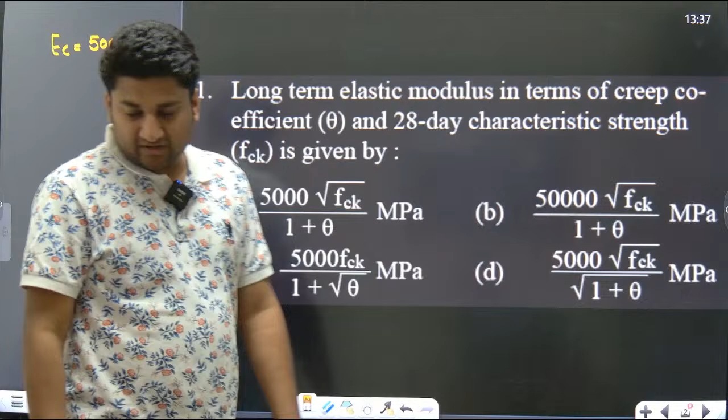Now short-term Young's modulus of elasticity for concrete is 5000 under root FCK. This is short term. Now when the effect of creep is taken, what will be the Young's modulus of elasticity for long term? For long term, the Young's modulus of elasticity is short term upon 1 plus theta. Theta is the creep coefficient. So when you are taking the long term, you need to consider the effect of creep.

Understood everyone? Now look very carefully. So this will be equal to 5000 under root of FCK, 5000 under root FCK upon 1 plus theta. So what is the value of theta? What is the value of theta?

The value of theta depends upon age of loading: 7 days, 28 days and 1 year. Understood? The value is 2.2, 1.6 and 1.1. For 1 year it is 1.1.

Clear everyone? So what is the correct answer? Option A is the correct answer: 5000 under root FCK upon 1 plus theta. Understood? Clear?

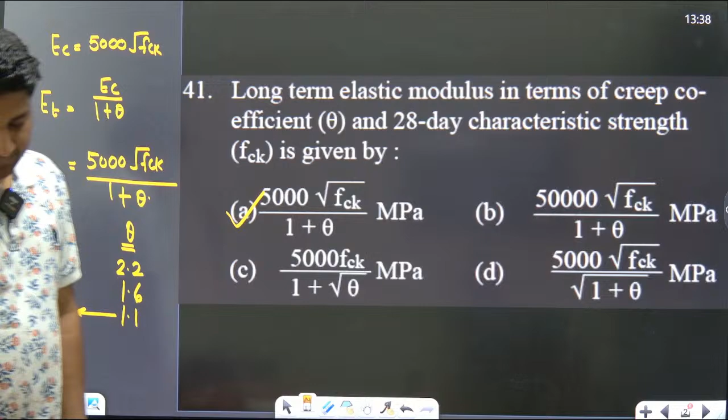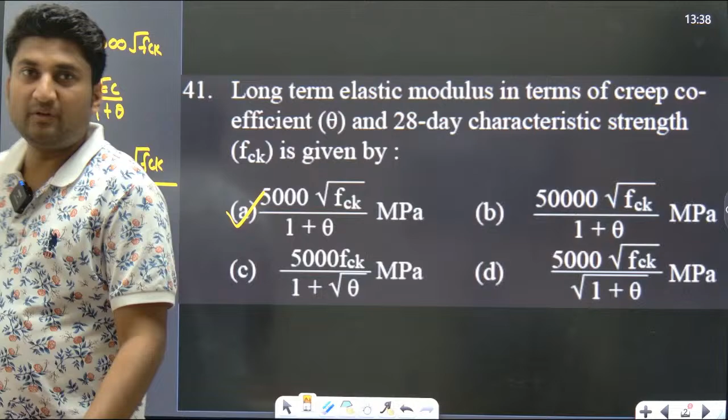Yes, so we'll move ahead with the next question. Answer the next question, guys. If sigma CBC is the permissible compressive stress in flexure compression in service, the modular ratio is.

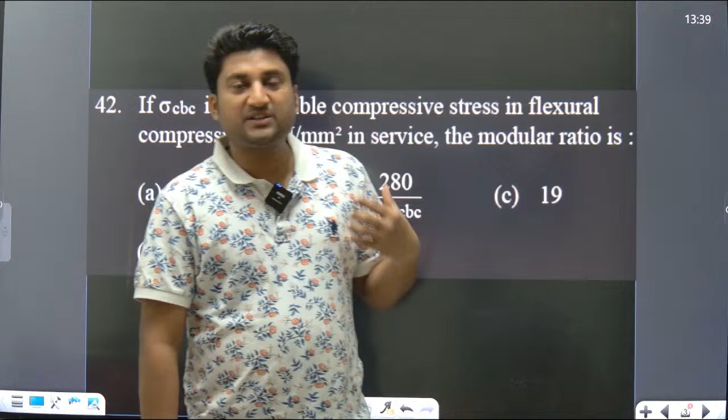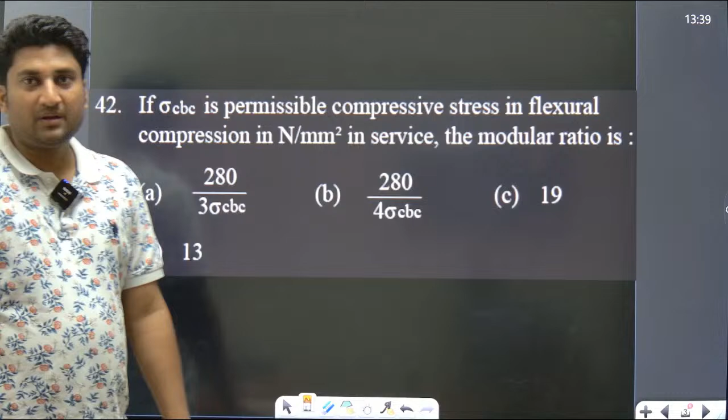The correct answer is - what is modular ratio? If sigma CBC is the permissible compressive stress in flexure compression, the modular ratio is defined as 280 by 3 sigma CBC. Understood, everyone? So option A is the correct answer. Now we'll move ahead with the next question.

The permissible shear stress in concrete depends upon. This is a very good question. There are two concepts: the permissible shear stress and maximum shear stress in concrete. So both the concepts are different.

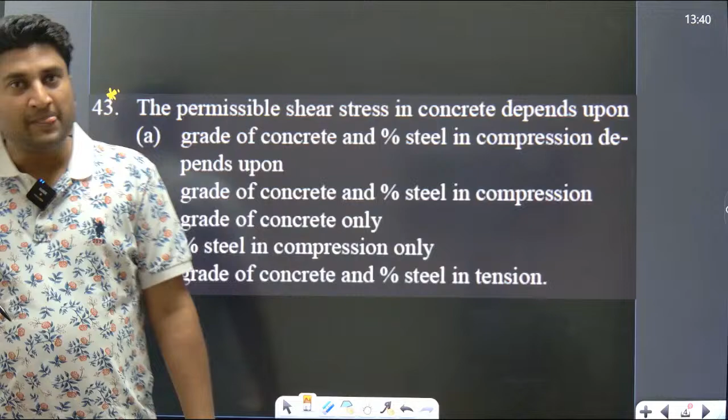We'll increase the level, brother, from the next class we'll increase the level. These are basic questions. The maximum state services exams have these type of questions only. Your speed matters in state services. So from next time I'll slightly increase the toughness level of the questions.

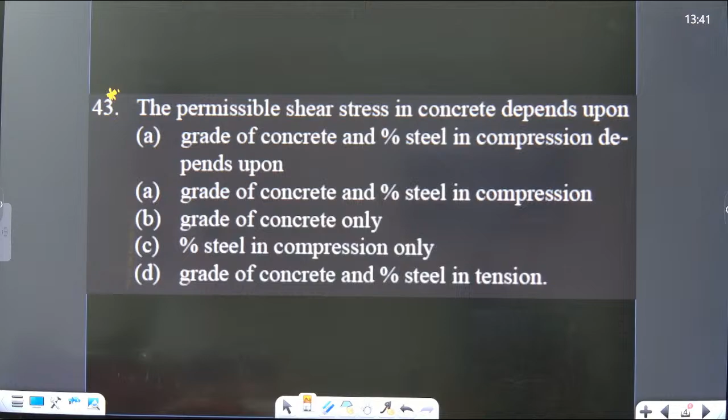Now what is the correct answer? The permissible shear stress. Now look very carefully, what is the permissible shear stress? The permissible shear stress in the concrete depends upon two factors: grade of concrete and percentage steel. But the maximum shear stress of concrete depends only on grade of concrete. Please make sure permissible shear stress depends upon two values, grade of concrete and percentage steel, but maximum shear stress on concrete depends only on grade of concrete. So here you are asked with the permissible shear stress, hence option D is the correct answer.

Option D is the correct answer. We'll move with the next question. Answer it very carefully, this is a very good question.

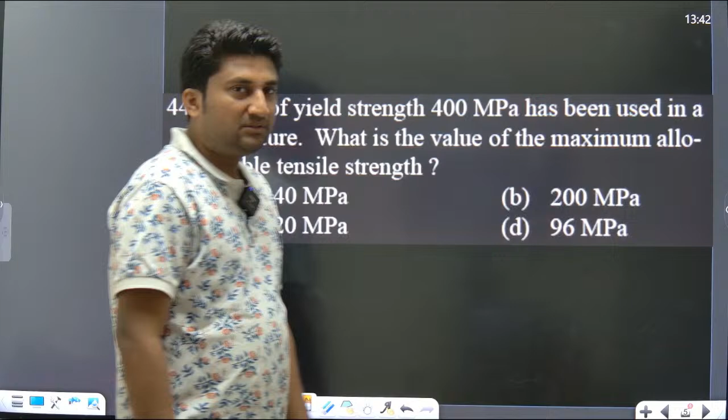This is a very good question. Most probably you'll be able to... please put a star mark because most students will give the wrong answer for this question. Please read it very carefully.

Now yield strength is 400 megapascal. If you have a steel of grade 400 megapascal, now look very carefully. What is the value of maximum allowable tensile strength? What is the maximum allowable strength?

Tensile strength has two values: maximum allowable strength in axial tension. So what is the permissible value? It is 60% of yield stress. And for bending tension, maximum allowable strength in bending tension is 66% of yield stress.

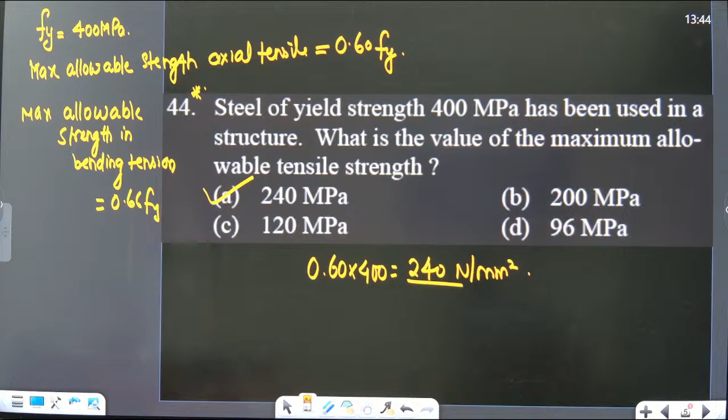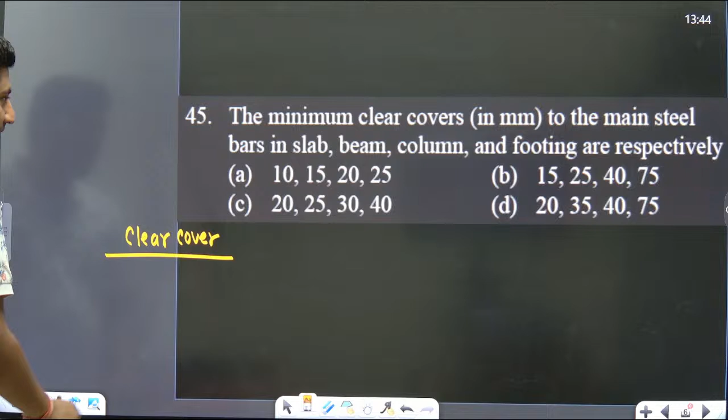Now we'll move with the next question, answer it very carefully guys. The question is about the minimum clear cover to the main steel bar in slab, beam, column, footing. What is the clear cover to main steel bar for slab, beam, then we have column, then we have footing? What will be the correct answer?

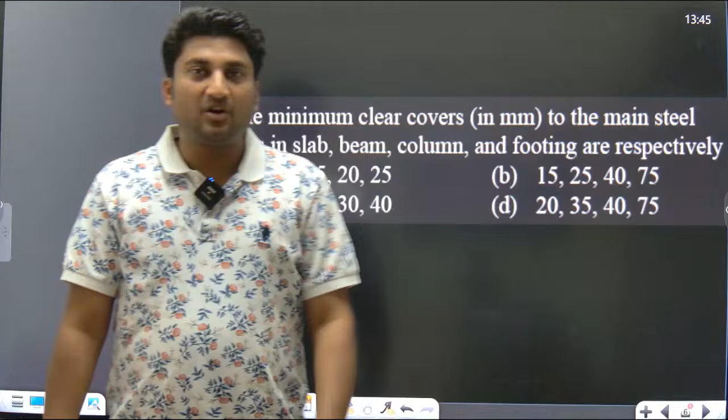These are standard values. So how much stress will you permit in the steel? That is 60% of yield stress. And if there is bending tension in steel bars, how much stress will you permit? That is 66% of yield stress. So what is the correct answer? What is the clear cover for slab, beam, column and footing?

So for slab it is 15 mm. What is the correct answer for this? Yes, very good, so for slab it is 15 mm, for beam it is 25 mm, for column it is 40 mm, and for footing it is 75 mm. This much clear cover should be given to slab, beam, column and footing. So 15, 25, 40 and 75 is option B. Option B is the correct answer. Understood everyone?

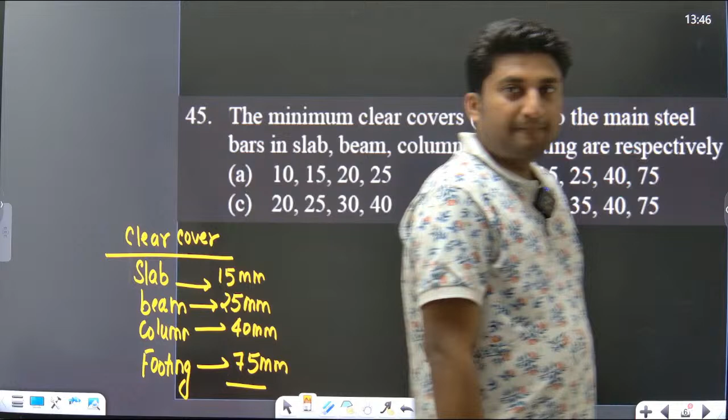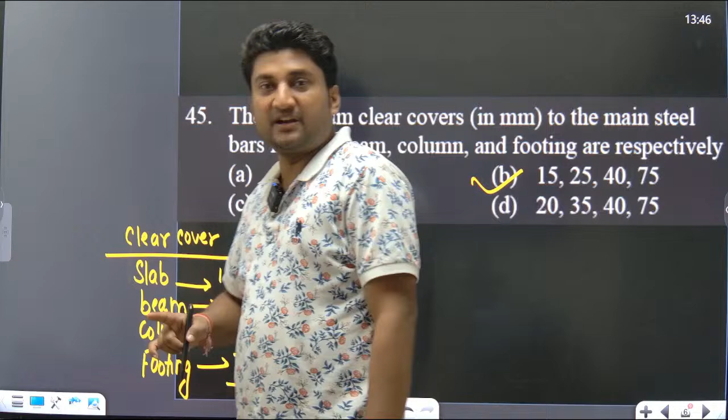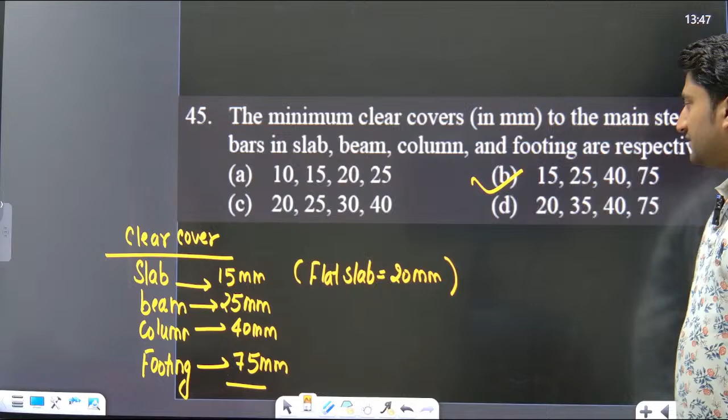Please make sure for flat slab it is 20 mm and for normal slab it is 15 mm. Please make sure it is for flat slab, for flat slab it is 20 mm. Understood everyone, please don't confuse it. Beam 25, column 40 and footing 75 mm. So please don't confuse between normal slab and flat slab. Only flat slab has the clear cover of 20 mm. That is why we have taken option B. Now moving with the next question, answer it very carefully.

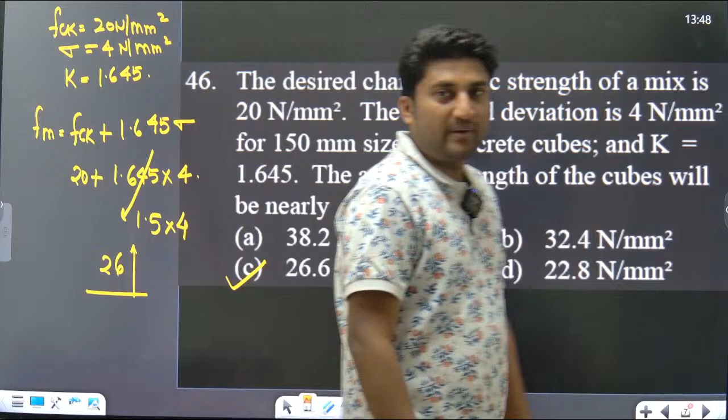Okay, so you can see very carefully, if I consider this value as 1.5 into 4, that is nothing but 6. 20 plus 6 is 26. So you will get the value slightly greater than 26. Only one option has the value slightly greater than 26. Hence option C is the correct answer.

Understood everyone? In the examination, you don't need to calculate each and every aspect, it is just an objective question. So consider this 1.645 as 1.5, so you will get the value as 6, so your answer is slightly more than 26. Hence you will get option C as the correct answer. This is what is called aptitude. In the examination where there is no calculator, you just need to apply your aptitude and reach the answer.

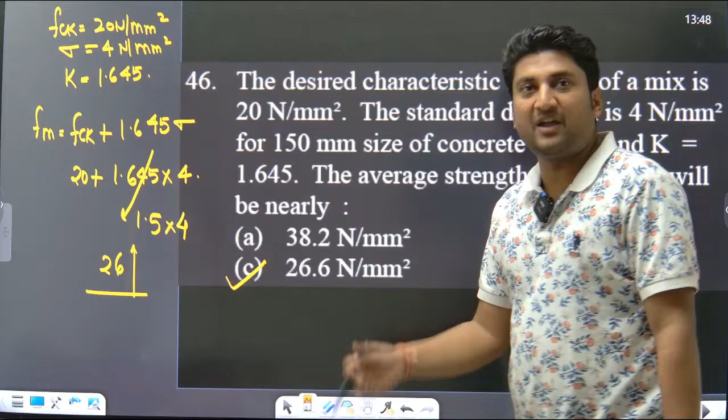Clear everyone? We'll move ahead with the next question. Answer it very carefully.

This is a very simple question, answer it, you'll get the answer. The value of creep coefficient of concrete at an age of 28 days loading is... Now, value of creep coefficient, we know that it depends upon age of loading and the value of creep coefficient.

So if you have applied the load in 7 days, the creep coefficient is more, 2.2. In 28 days, it is 1.6, and for 1 year it is nothing but 1.1. So in the question you are asked about 28 days, the value is 1.6. Option B is the correct answer. Understood everyone?

Clear? Option B is the correct answer. We'll move ahead with the next question.

This is a good question, please answer it very carefully. If no reinforcement is given in the RCC structure, after concreting, the concrete shrinks. So to consider the shrink, what is the shrinkage strain in the concrete which is taken? Sometimes minimum reinforcement is provided to prevent the stresses due to shrinkage. So the approximate value of shrinkage strain in concrete is...

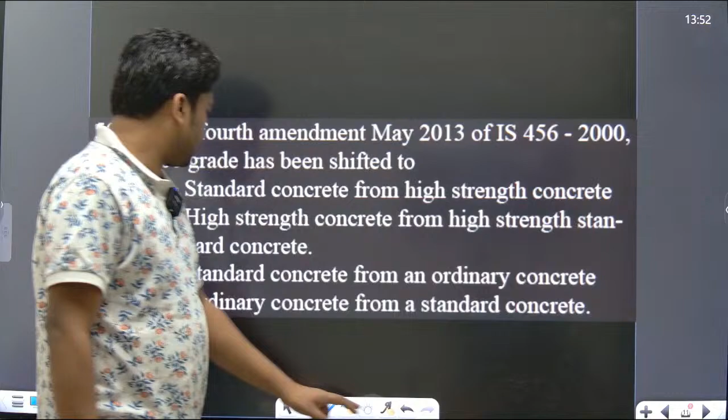Option B is the correct answer. We'll move ahead with the next question. Please answer it, this is a very good question. Please answer it, this is a good question.

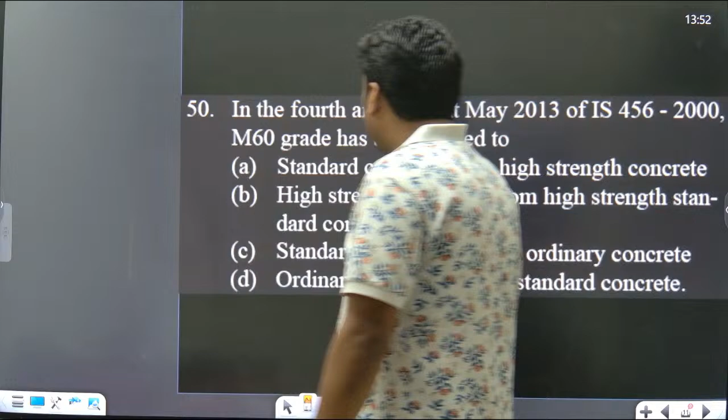In the 4th amendment May 2013 of IS 456-2000, M60 grade has been shifted to. Now look, there are three types of concrete as per IS 456-2000: ordinary concrete, standard concrete, and high strength concrete. Ordinary concrete is M10, M15 and M20. Then we have standard concrete, which includes M25.

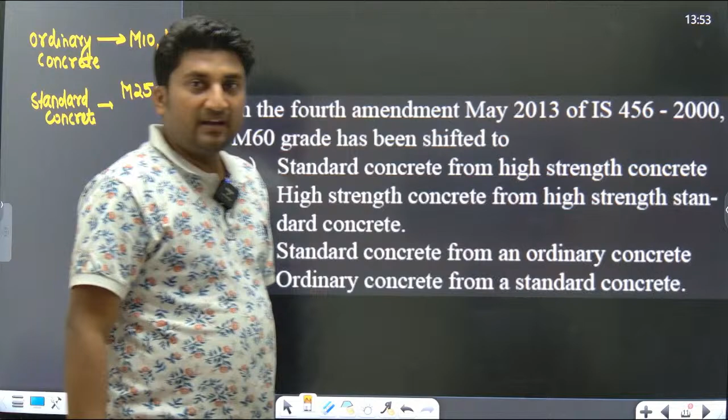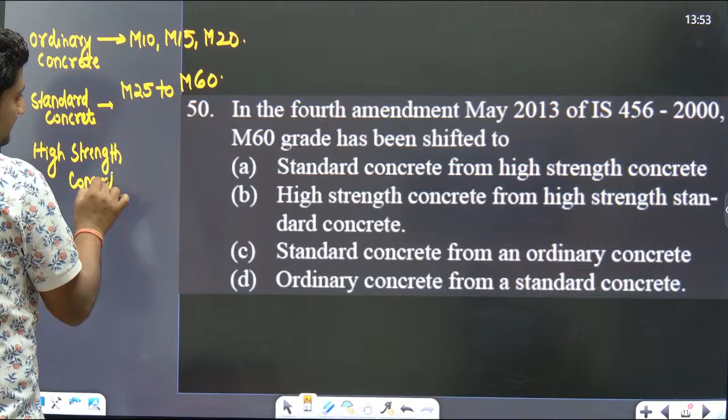Now look, earlier, what is the correct option? Now look very carefully, this is M60. M60, from M25 to M60, is standard concrete. Then we have high strength concrete, look very carefully.

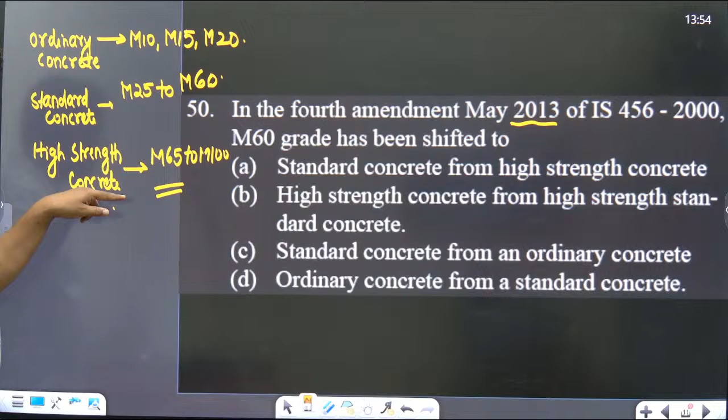Yes, very good, M65 to M100 is high strength concrete. Now look, earlier, this is the amendment in 2013. Earlier, look very carefully, this M60 was in high strength concrete, but now this M60 has been shifted to standard concrete. Now, in the 4th amendment May 2013 IS 456-2000, M60 grade has been shifted to - earlier it was high strength concrete, but now it is shifted to standard concrete.

High strength concrete from high strength standard concrete, standard concrete from ordinary concrete - no, this is wrong. It should be standard concrete from high strength concrete. Option A is the correct answer. Clear? So this is the amendment on May 2013. Understood everyone? Option A is the correct answer.

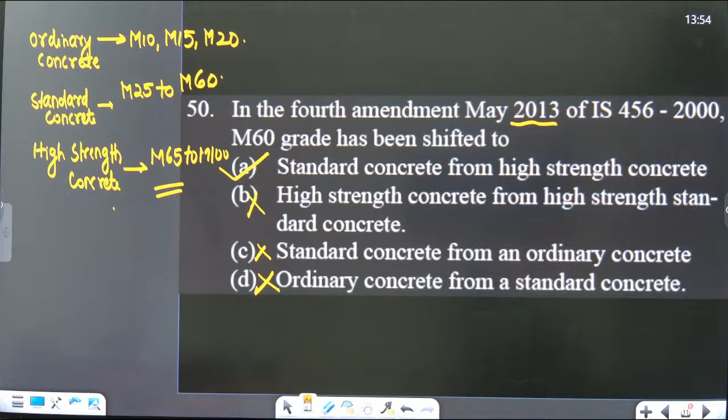The development length of each bar, when 3 bars are bundled together, is increased. You have 3 bars bundled together along the longitudinal axis - this is bar 1, bar 2, and bar 3, all overlapped and bundled together. So when the 3 bars are overlapped and bundled together, the development length is increased. How much is it increased? Answer it very carefully, guys.

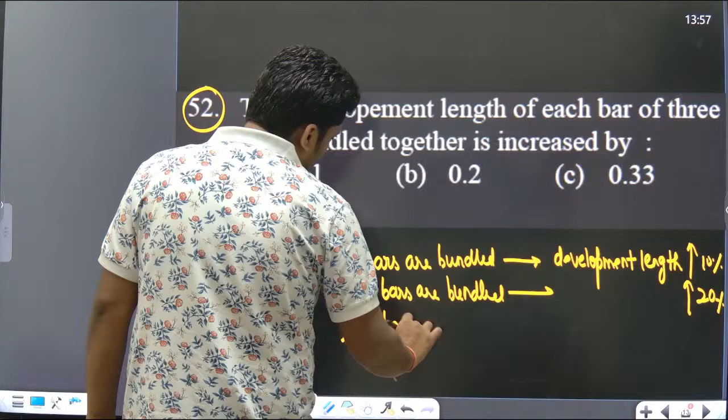When 2 bars are bundled, as per IS 456, the development length is increased by 10%. When 3 bars are bundled, their development length is increased by 20%. And when 4 bars are bundled together, the development length is increased by 33%. So since here 3 bars are bundled, option B is correct.

Understood everyone? Yes, this is the correct answer. Now moving ahead with the next question. Answer it very carefully.

Loss of stress with time at constant strain in steel is called relaxation, ductility, creep, or shrinkage.

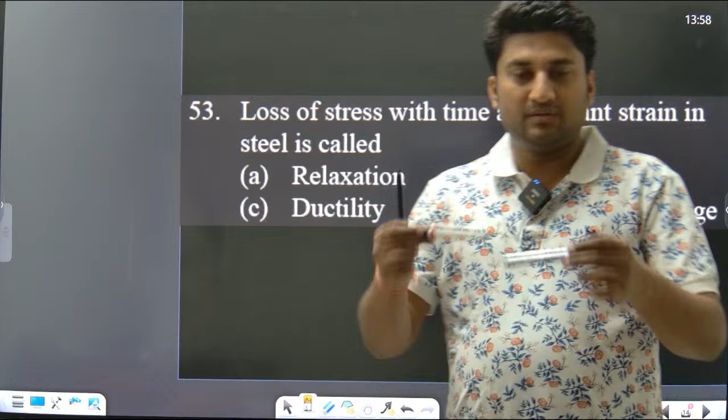Look, these two bars are bundled, overlapped. Now if we have a third bar also above it, this is the bundle of 3 bars, so the development length is increased.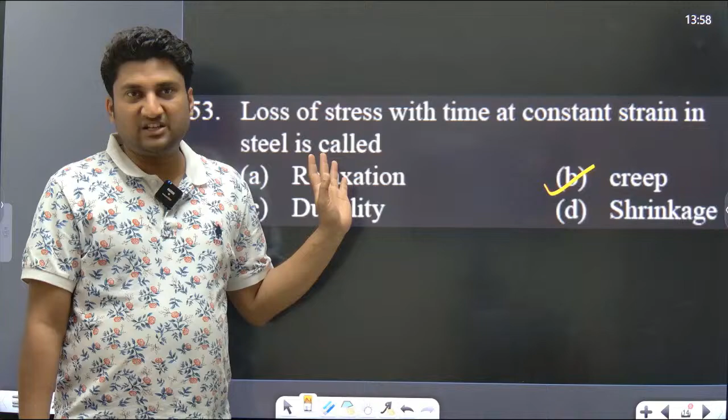This is called creep. Creep initially increases with time and then decreases. So initially we have elastic strain and then plastic strain. When you remove the load, all the elastic strain is recovered, but some of the plastic strain is left - that is permanent deformation. Clear? Option B is the correct answer.

That is creep. Now answer the next question.

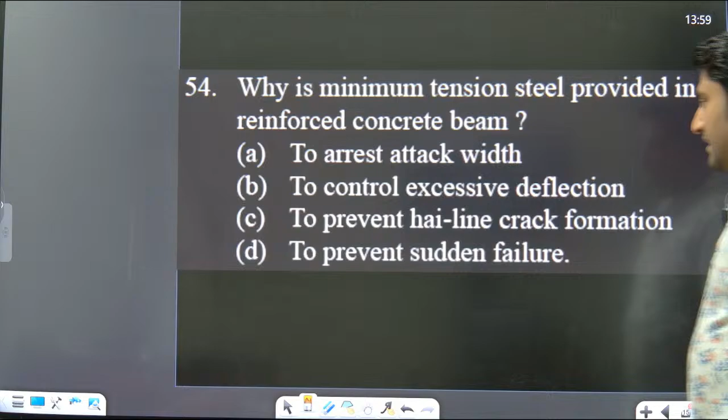Now please look very carefully - I'm really sorry, in the previous question I have taken the wrong answer. You were asked about the loss of stress. Creep is the continuous deformation over a period of time. I'm really sorry, the correct answer is not creep. Now look very carefully, I'll explain you how.

Let us suppose we have a bar, and on this bar there is a continuous load P. Whenever you apply the load P, what will happen? There is an elastic deformation - the moment you apply this load P, there is an elastic deformation of dx. This dx is nothing but elastic deformation.

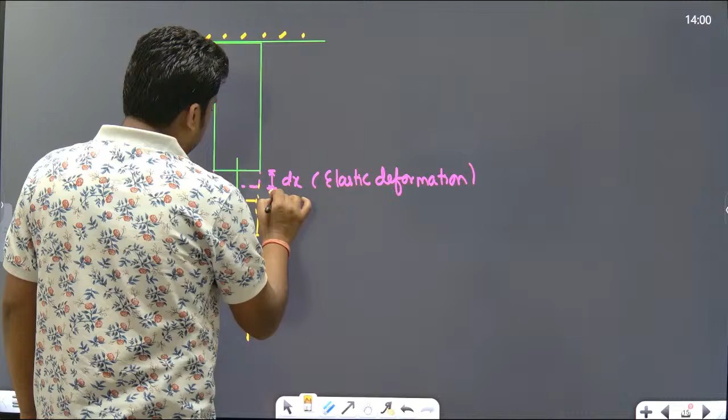But over the period of time, because of this continuous load, what will happen? In this section you will have, over the period of time, this plastic deformation, and it increases as time passes. This dy is known as plastic deformation.

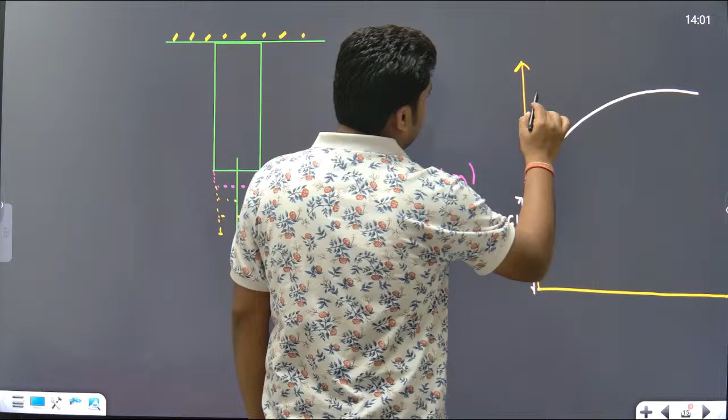So if we plot the graph of strain, what will happen? Initially when you apply the load P, this much is the strain, but after a period of time this much is the strain. So this strain is elastic deformation, elastic strain, and this is nothing but plastic strain. These strains together are known as creep.

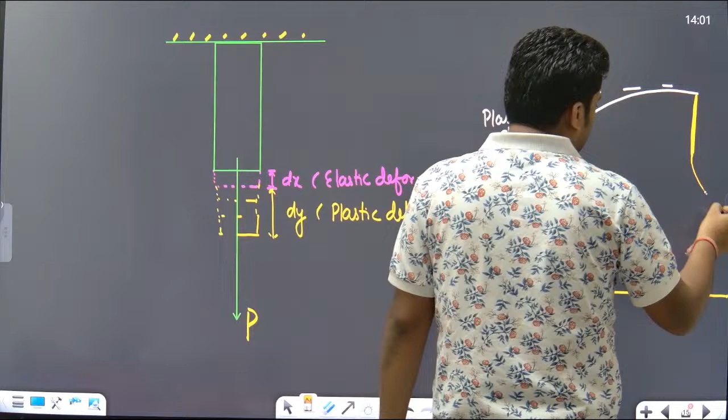Understood everyone? When you have released the load, after removing the load, what will happen? This much of the strain is recovered, and then afterward a few of the strain is also recovered. This yellow curve indicates unloading. This much is elastic recovery, and this much is known as plastic recovery. This much strain is not recovered - this is known as permanent deformation.

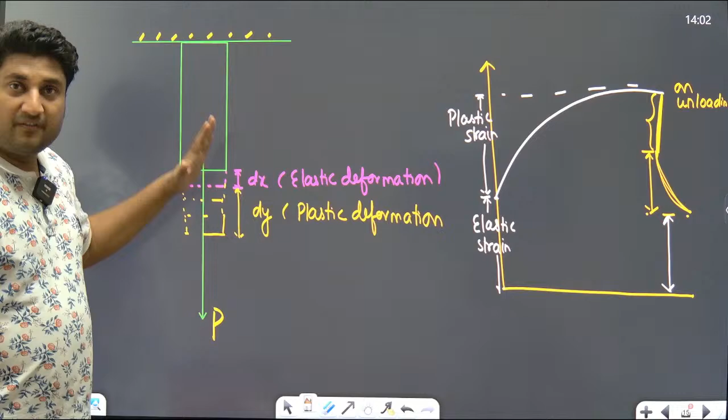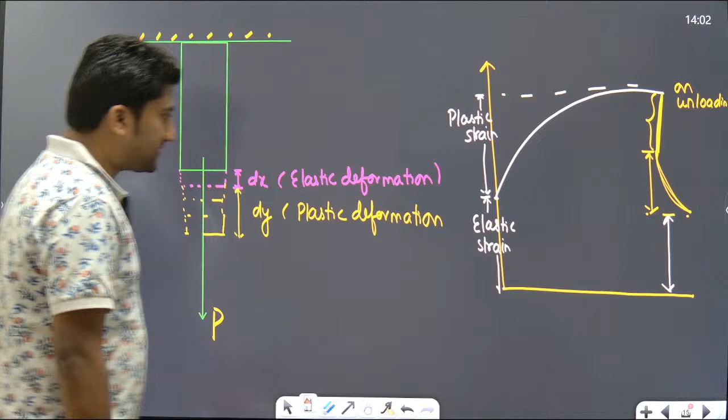Understood everyone? So it is a time dependent process - as time increases, the strain also increases. Which type of strain? This is permanent strain, plastic deformation strain. So this deformation is nothing but creep. But whenever this creep happens, stress is also generated. But whenever the elastic strain is recovered when you remove the load, there is a loss of stress also - that is known as relaxation. So I misunderstood it earlier - the loss of stress is known as relaxation. Please mind it, the loss of stress is known as relaxation.

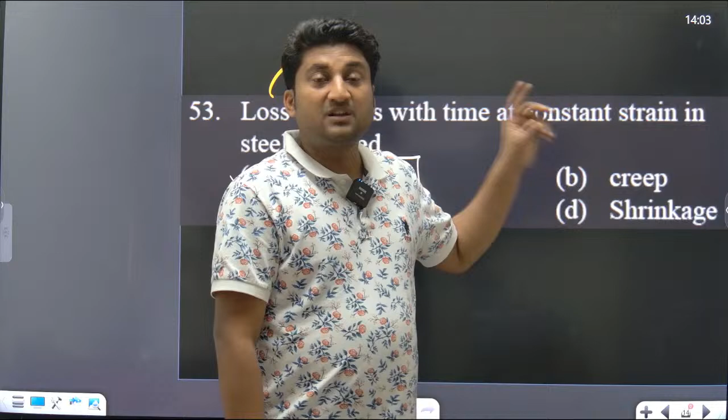Option A is the correct answer. Whenever you find loss of stress, you'll get the answer as relaxation. So continuous deformation over the period of time is known as creep. But during the creep, if there is some loss of stress, that is known as relaxation.

And what is ductility? Ductility is nothing but the ability of material to deform into wires. Technically we say that if material has more than 5% post elastic strain, meaning plastic strain, then only you will be able to deform it into wire. That is ductility.

Understood, everyone? So relaxation is the correct answer.

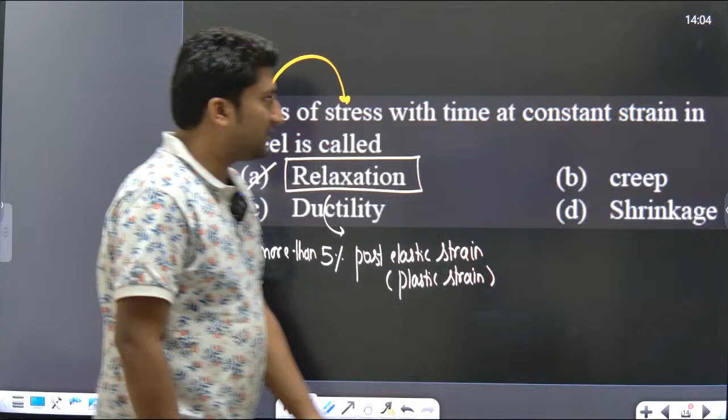Now moving ahead with the next question, please answer it very carefully. Why is minimum tension steel provided in reinforced concrete? This is a very good question. Every time you will see in beam also we provide minimum reinforcement, in slab also we provide minimum reinforcement, in column also we provide minimum reinforcement. So why is this minimum tension reinforcement provided in reinforced concrete beam? To arrest crack width, to control excessive deflection, to prevent hairline crack formation, to prevent sudden failure.

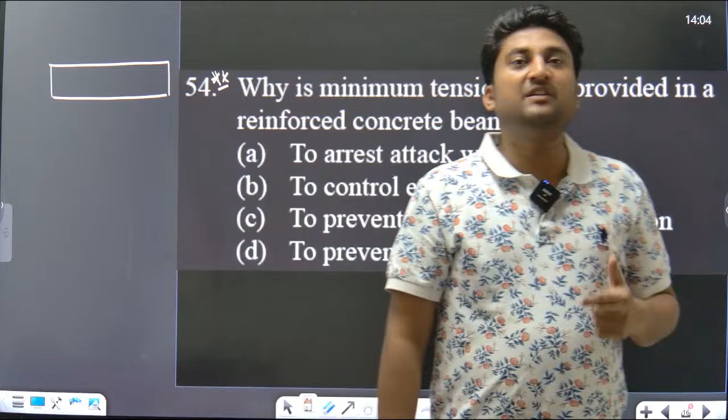Now look very carefully. Let us suppose I have this beam. Whenever I casted this beam, there is no reinforcement because the load is very less, within the permissible limit. But what happens is this beam is within the fixed support. After the casting of the beam, evaporation of the water, which is pore water or gel water, takes place. After the evaporation of that gel water, shrinkage of the concrete will take place.

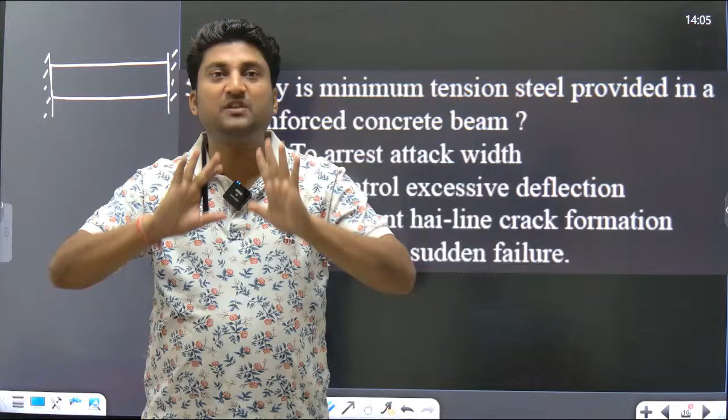Because you have arrested this shrinkage, resistance of the movement is known as strain. Whenever you resist the strain, stresses are developed. Because of these stresses, hairline cracks are developed. Small cracks are developed on the surface. These are known as hairline cracks.

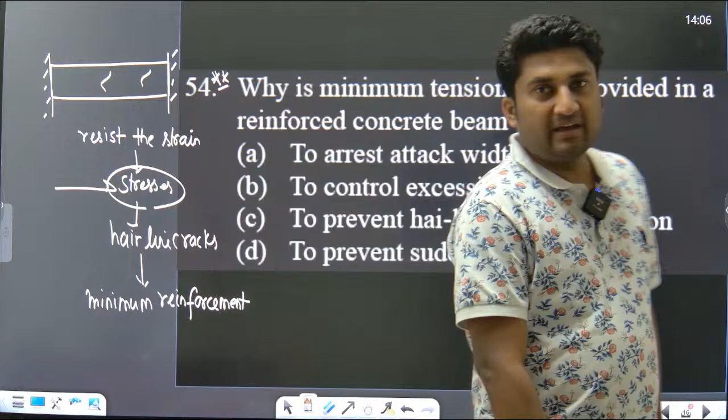To prevent these hairline cracks, minimum reinforcement is always provided. Understood, everyone? Clear, everyone? So what will be the correct answer? Why in RCC are minimum reinforcements always provided? To prevent hairline crack formation. Option C is the correct answer.

Please put a star mark on this. And it is not a sudden failure, it is a gradual failure, because evaporation of the gel water from the surface takes place. It takes time, it is not a sudden process. It is a gradual process. Because of this, hairline cracks are developed on the surface. To prevent this, we always provide minimum reinforcement.

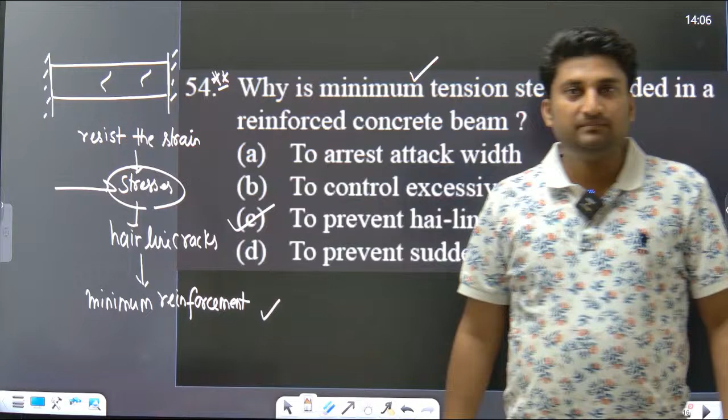Understood? Shall we move ahead? Okay, we'll move ahead with the next question. Please answer it very carefully.

What is the maximum permissible acid soluble chloride content for reinforced concrete? This is a very good question.

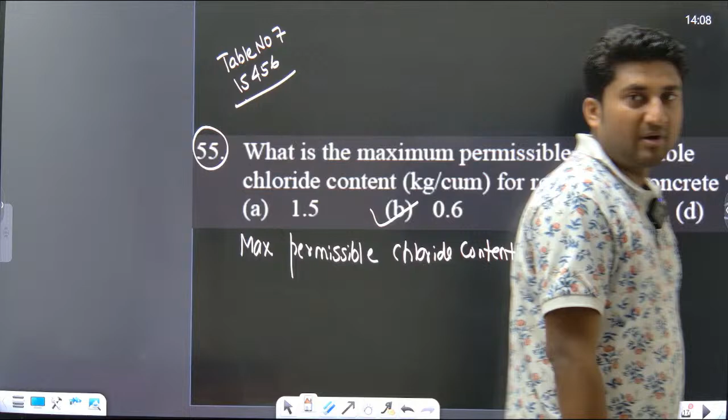What is the correct answer? Now this is a very good question. You will get the answer of this question on table number 7 of IS 456. What is the maximum permissible acid soluble chloride content? Because more the chloride content, it will lead to corrosion of the reinforcement. So whenever you are using water to make concrete for reinforced concrete, the maximum permissible acid soluble chloride content is 0.6 kg per meter cube. So option B is correct. Please put a star mark on this. This was asked in one of the examinations.

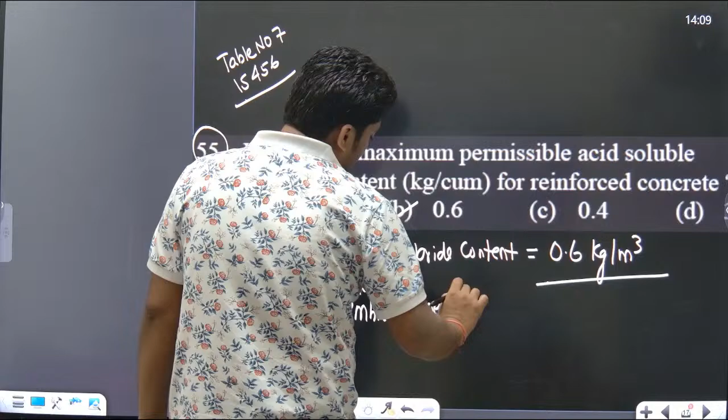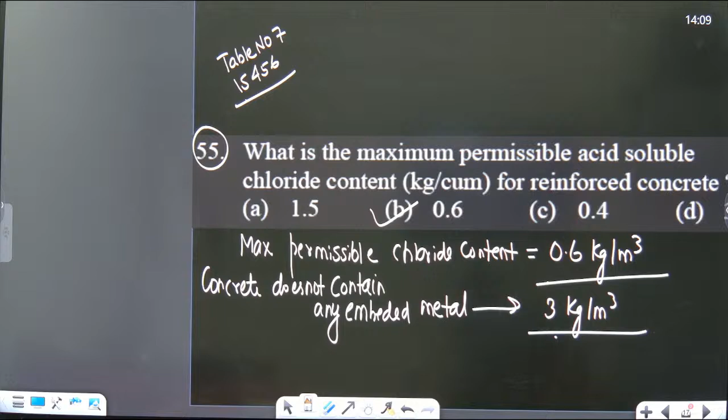Now note down one more thing. If the concrete does not have any embedded metal, if you are concreting for plain cement concrete where there is no metal inside the concrete, then what is the maximum value of chloride content? That is nothing but 3 kg per meter cube. This is the maximum value. So these 3 values you need to know. I hope it is clear. Shall I move ahead?

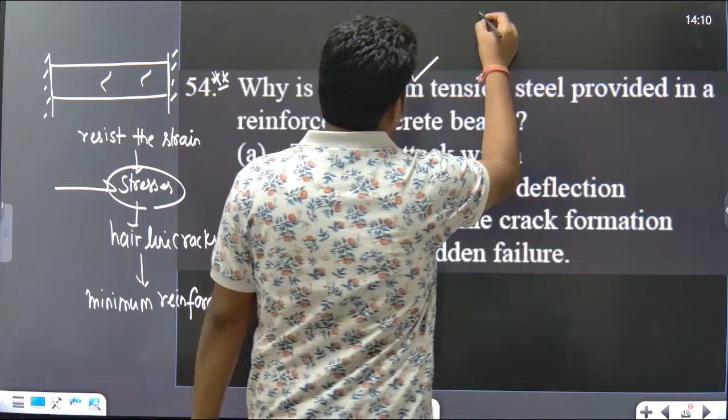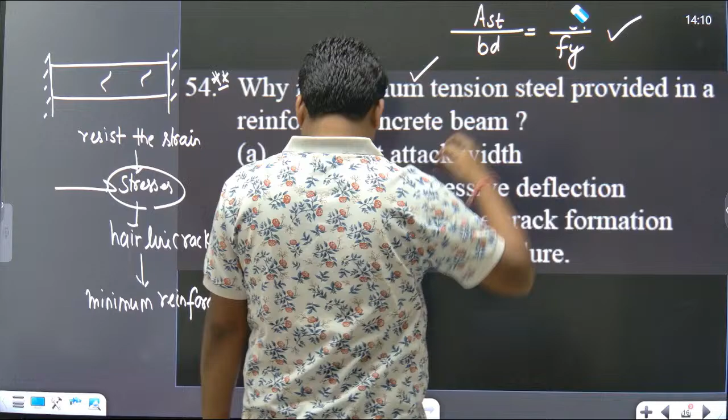Next question. In the previous question we have seen minimum tension reinforcement. Do you know the minimum tension reinforcement area? This is nothing but AST upon BD, minimum tension reinforcement upon B into D, equals 0.87 upon Fy. Is this correct or wrong? Is this correct or no? This is 0.85 upon Fy. Very, very good. AST upon BD, minimum tension reinforcement is 0.85 upon Fy. Very, very good, everyone.

Now moving ahead, please answer this question.

In an under-reinforced section, what is the case? Let us suppose this AST is for a balanced section. Now answer it very carefully. At balance section, what will happen? This will reach its permissible value sigma CBC, and this will reach its permissible value sigma ST upon M.

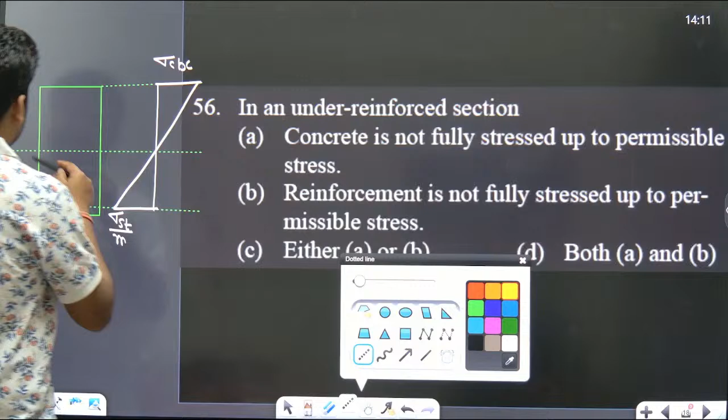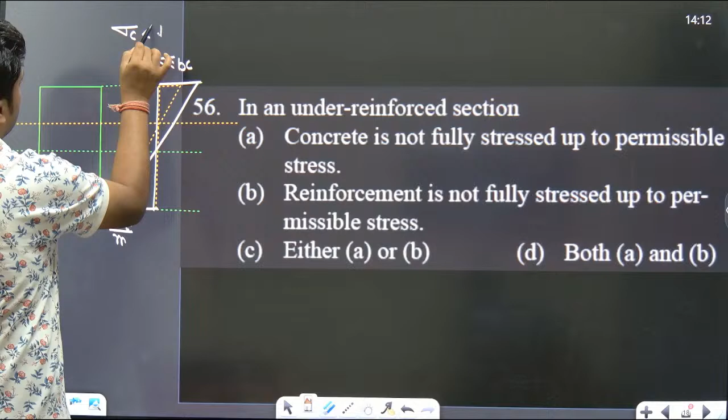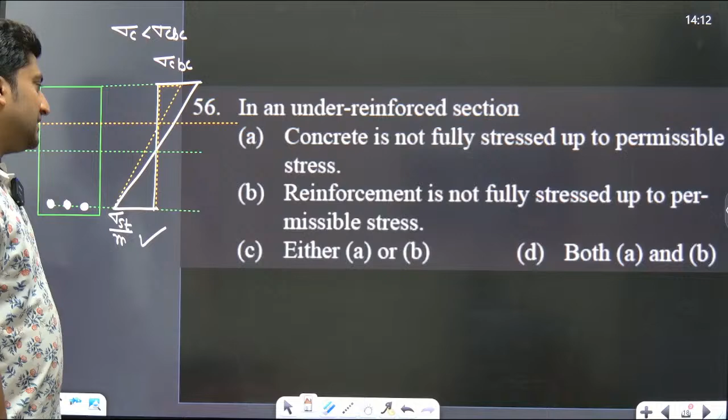But if it is an under-reinforced section, this means the reinforcement given is less than the balance section. So what will happen? Look very carefully, you can see the yellow one. The stress in the concrete will be less than sigma CBC, but stress in the steel reaches its permissible value sigma ST. So failure of the steel takes place before the concrete, and concrete is not fully stressed up to its permissible stress. Reinforcement is fully stressed up to the permissible limit.

Option B is wrong. Either A or B is also wrong. So what will be the correct answer? Option A will be the correct answer. Both is also not the correct answer. Option A is the correct answer. So this is a very simple question. Understood everyone? We'll move ahead with the next question.

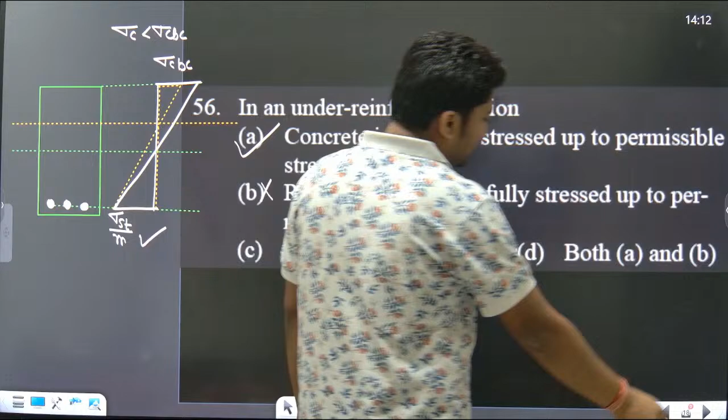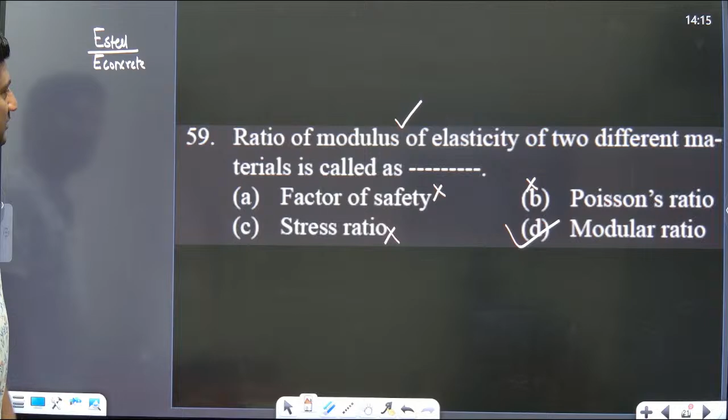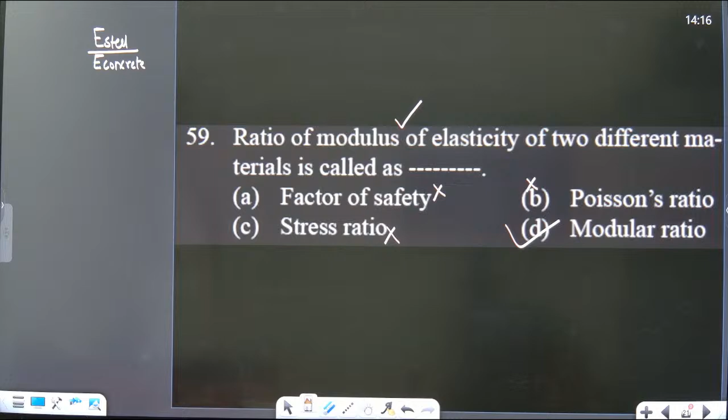Hence option D is the correct answer. Understood everyone? Option D, Young's modulus of steel to the Young's modulus of concrete. This is nothing but modular ratio, clear everyone? This is modular ratio M. I hope you have understood this point.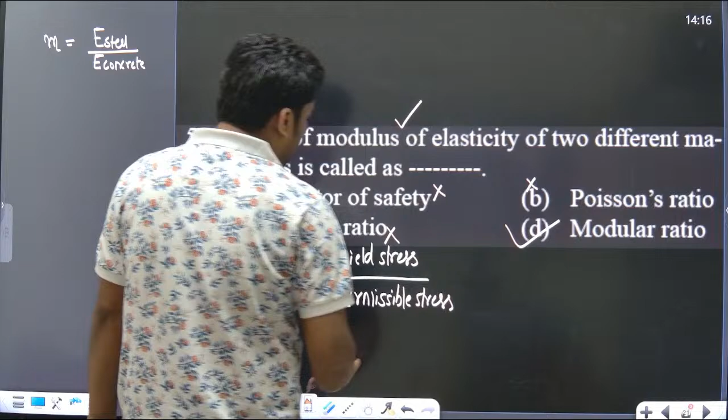Factor of safety is not the correct answer. Factor of safety is defined as yield stress to permissible stress, yes or no? Yield stress to permissible stress - this is factor of safety. Understood everyone? And we are talking about the ratio of modulus of elasticity, hence option D.

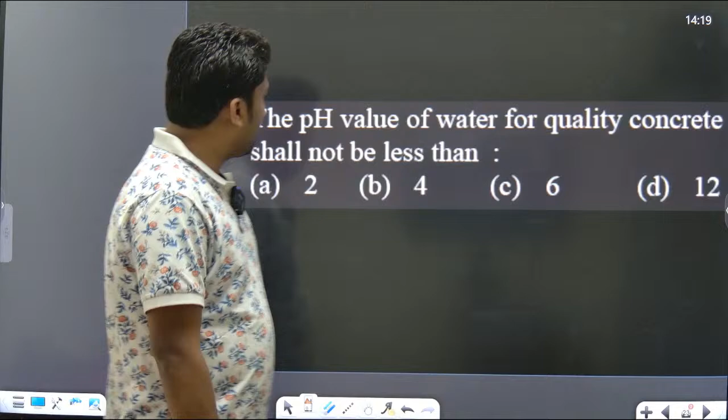Very good, the correct answer is... please answer it very carefully. The pH value of water for quality concrete shall not be less than 6. For concrete manufacturing, the pH of water shall be in the range of 6 to 8.5, so it shall not be less than 6.

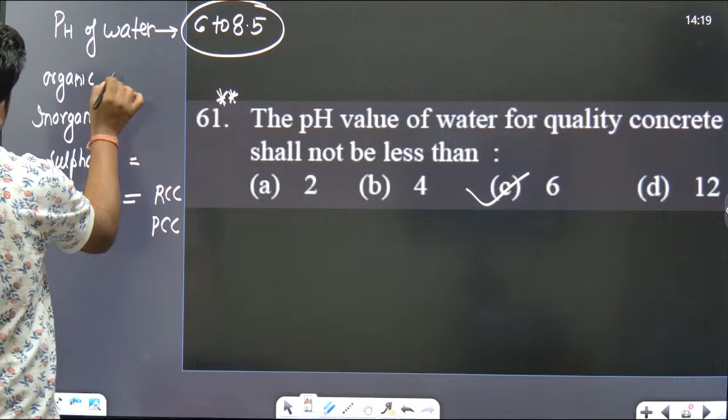Here you need to remember some values also: organic matter or organic solids, inorganic solids, sulfates, and chlorides. Chlorides have two values, for RCC and for PCC. So sulfate, organic content and inorganic content values you need to remember. Organic content is 200 milligram per liter, inorganic content is 3000 milligram per liter, sulfates is 400 milligram per liter, and for chlorides it is 500 milligram per liter.

These are the maximum values, shall not be more than. For PCC, it is 2000 milligram per liter, sulfate is 400 milligram per liter. Organic content is 200 milligram per liter, should not be more than that. And inorganic is 3000 milligram per liter.

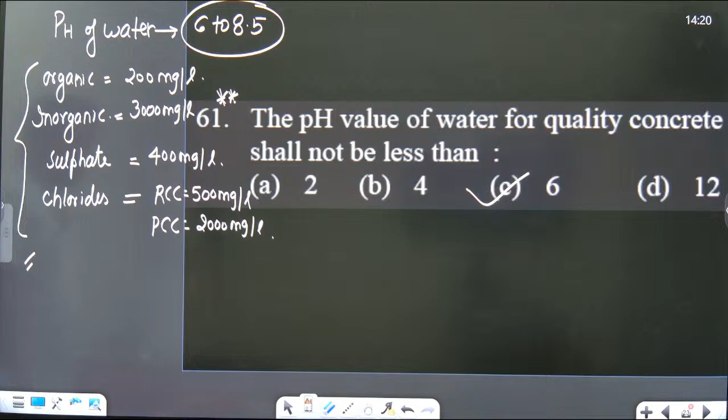So here you are asked with pH. pH is 6 to 8.5, so you need to remember this value. Please note it down in your copy. Written everyone? Shall I move ahead? pH is 6 to 8.5. Yes, very good. We'll move with the next question, the last question for today's session.